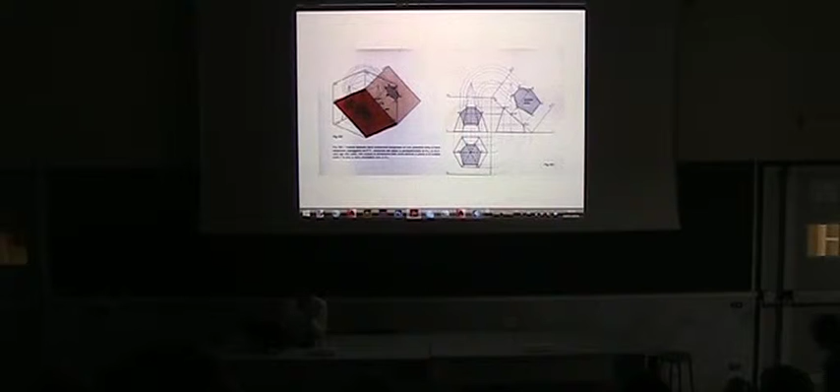Through these exercises, we start to be confident in knowing what's going on. So if we read an exercise text, we feel that we can do it ourselves, and that we can do it right. Then we start to imagine that this mental space has a light coming from somewhere, which gives the volumes a more concrete presence. And we get lost in these very complex drawings, which have very strict rules. They have their own law, and we understand that through these rules we can get to the end of an exercise.

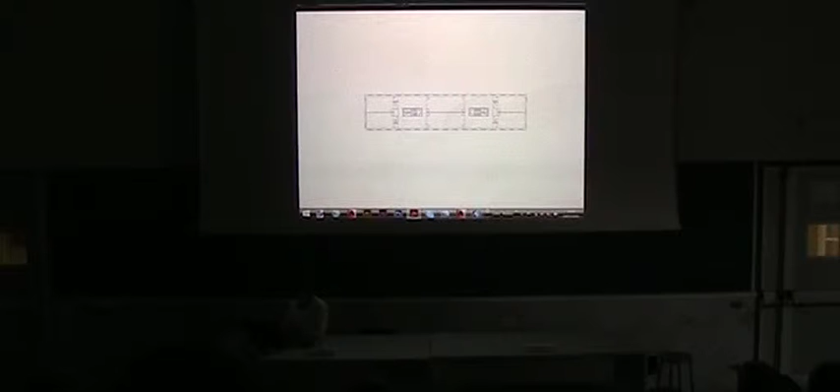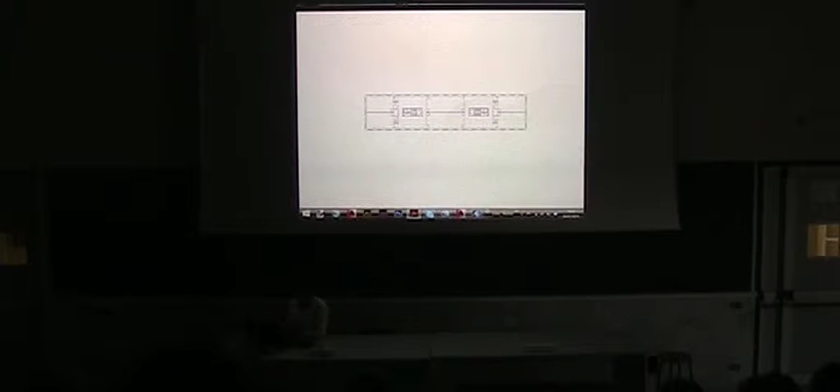This is a school made of glass and wood structure on the perimeter without any corridor. So classrooms are connected without corridors through 2 staircases. This is a house on 3 levels, in which each floor has a different relation to the exterior, to the landscape. This is another house I will show later, and this is a house with a 45 pitched roof.

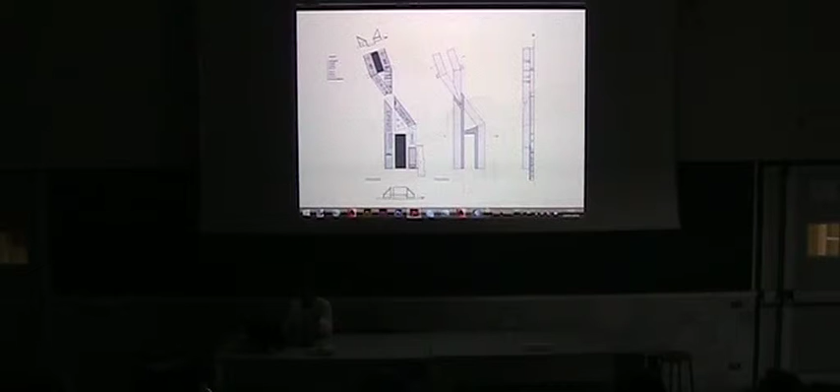This is a resort in Thailand, on Phuket Island. It's a project which is made in 2 parts. One is the apartments, and the other one is the restaurant and lounge bar. And it's made of 2 bodies, same shape but twisting each other. And so you have a space, a courtyard, which has high walls, and a courtyard which has low walls to define the space, the opposite of the space. Yes, you can see in the plan sections. This project was made all in metal construction.

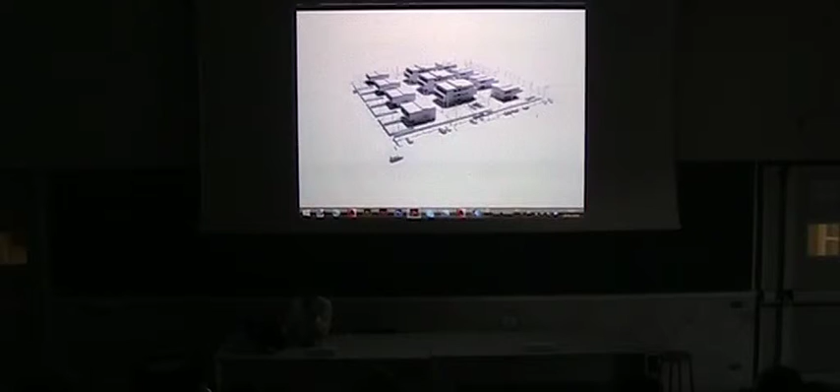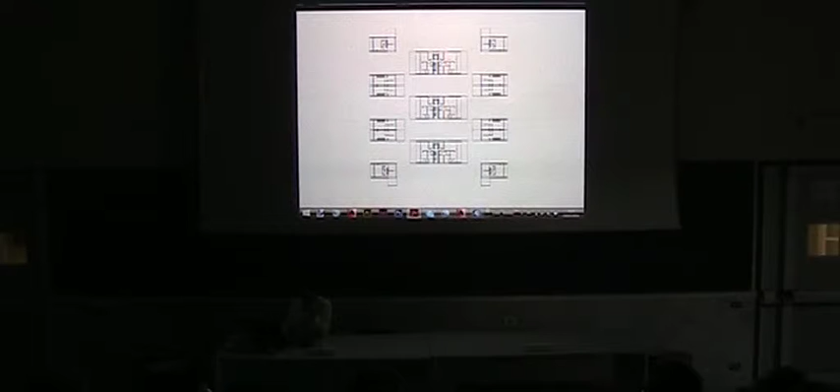One project of housing, which has interesting development because of the economical price. We started with a very simple principle to repeat the same buildings, and then because of a new price situation, they decided to change the typologies, but the scheme is still the same. And as you see here, it's mostly the same houses repeated. And the plan is not a plan of one single element, but it's a plan which is a whole, a unity again, made of 11 different volumes.

And again, one detail, because we believe that every project has one main detail. It's not about making a lot of details, it's about understanding which is the most important detail of each project. And this is the plan with a new definition of different typologies.

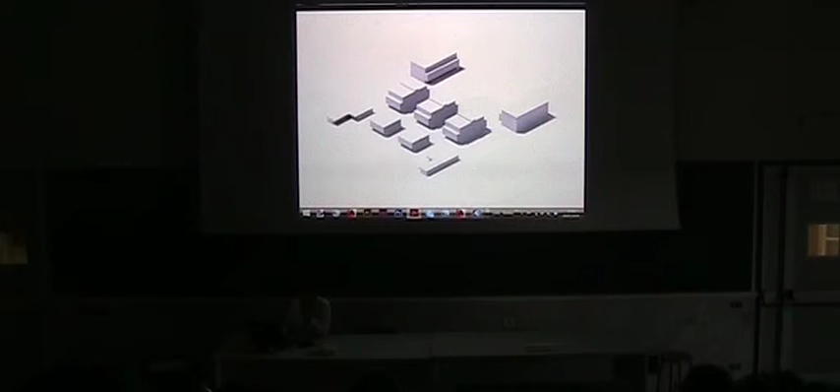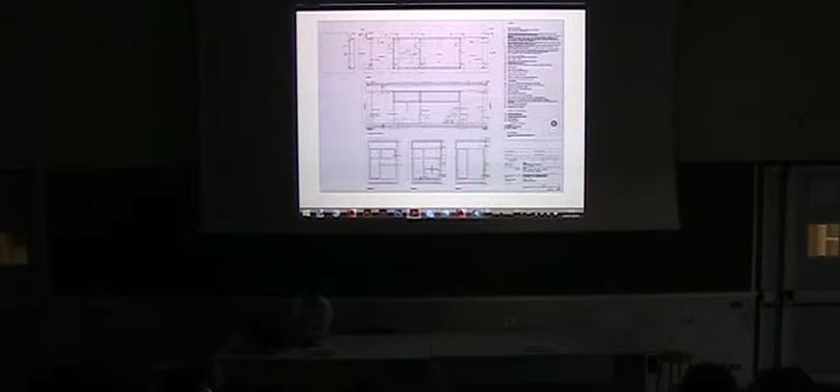This project is almost finished. It's dogs and cats housing. It's a place where abandoned animals are kept. And it started to be a modular project, a repetition of a single unity to make a variation. And this is the final unity, a very simple one. Of course, it has to be very simple, with a place where they stay, inside and outside.

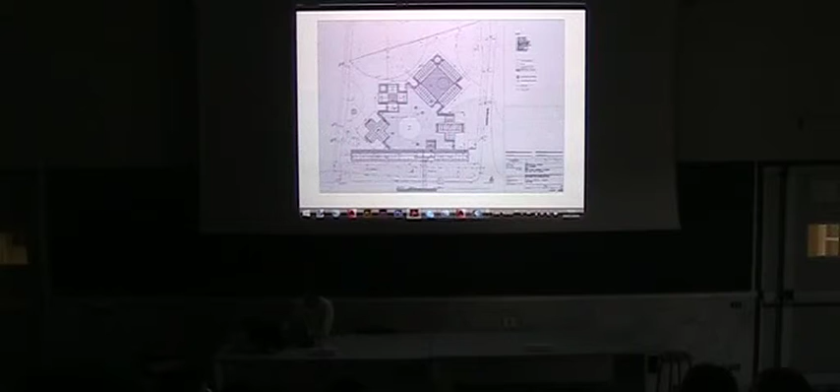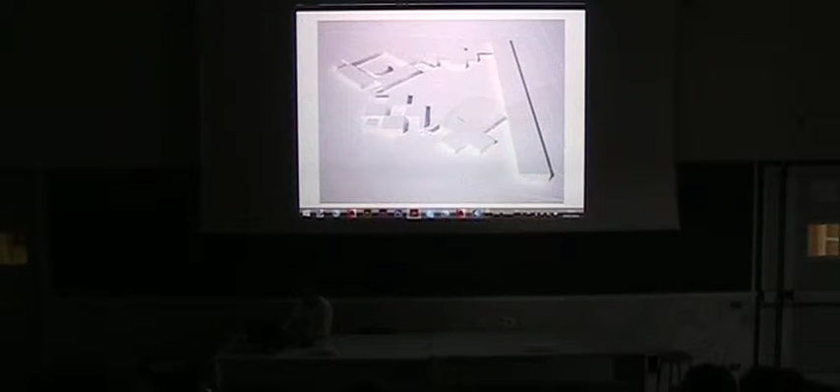And the repetition of this modular element in wood is making a complex of 4 pavilions and one main building, service building, and the 4 pavilions are twisted 45 degrees, one to each other, and create a central space. But also they have one central space each as a courtyard, that is the courtyard for the dogs or the courtyard for the cats. And this strong geometry you can see here in the foundations, or this strong 100 meters long wall of the service building.

Courtyard for the dogs, courtyard for the cats, and this recent image. And of course we exercise a lot of competitions, which is a way to produce architecture, to produce ideas, and to keep the brain on exercise.

And we won this competition, which is interesting because it's a house for builders, which is a place where builders learn how to build. So the project deals with materiality and process of construction, and we decided to use two very basic and very old materials, which are bricks, a small piece of bricks, and concrete. And the buildings are two buildings, but they make a unity. One building is a school, and one building is an atelier to learn how to build. But they are all made out of concrete.

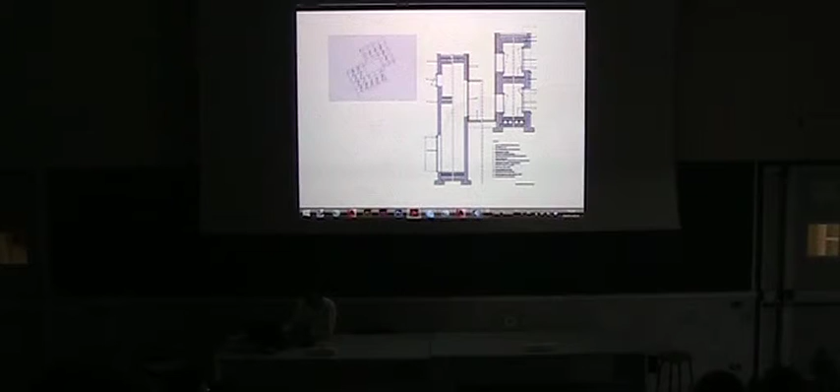One is one single wall with no insulation, and the other building is two walls with insulation. So the buildings outside and inside are both the same materials, and the courtyard is covered by bricks, as you can see on the plans. This is the atelier, and these are classrooms, all made out of concrete.

And these projects in Switzerland had a first prize and some other prizes. In Bern, it was a housing project along the railway line, and we could win the project because of the urbanistic idea, which deals with the linearity of the railway lines and the rhythm of the city, of a future city which would be built afterwards.

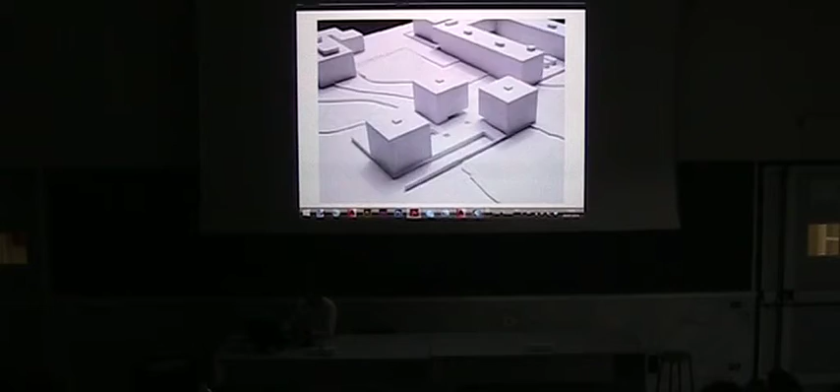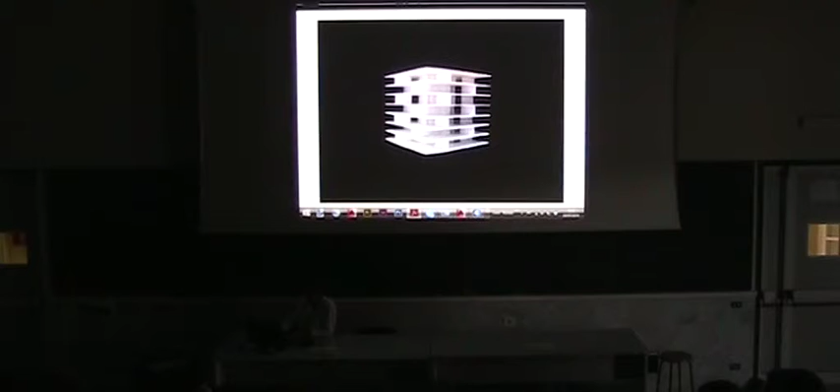For the students' housing in Zurich, the idea was how to make three buildings with one window. The buildings are cubic buildings, and the window goes around the four facades in a way that there is not a fundamental facade, but all four facades are equal. And this is the unit of the student room with a big window, and this window is prefab and it goes around the corner in this way, so that there is no principal facade, and also the structure is twisting all around.

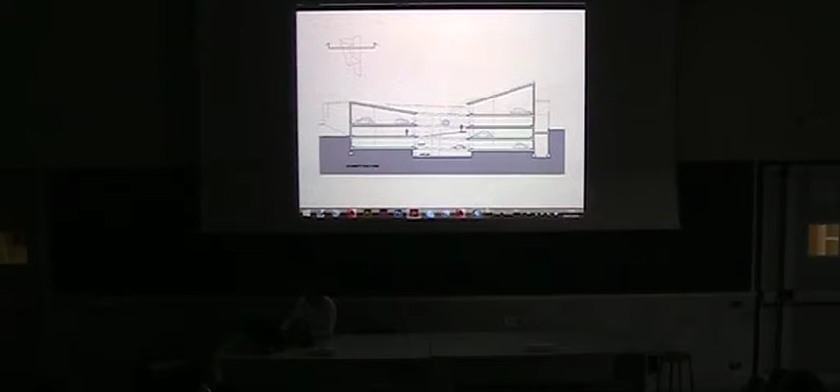And the parking building, which has been made with a courtyard, and the parking is all in ramps going up and down with 3%. Going up makes a spiral, and the courtyard is where people walk to go to the car, and the slabs and pillars are all inclined 3 degrees, and the roof also is not flat, so that the water will come down in the courtyard, and the light is also coming down as in a palazzo.

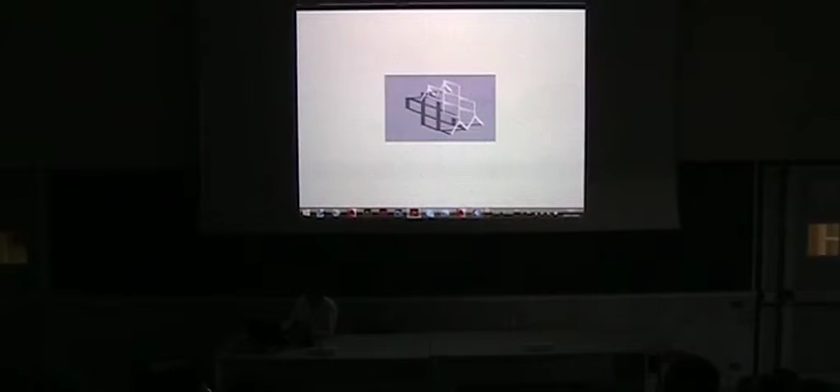Our school complex in Bern, where we established just one system of construction based on this element of wood. It's all in wood, and it's the superposition of the same structure which makes the buildings and the facade. And this is the modular element, structural element, plan, and the plan I showed before and repeat.

And this is also another competition won in Milan for the Expo 2015, and all these small slab buildings are meant to be made by one system of construction. We proposed to make this grid of 5 meters, but using not a square but these shapes. By twisting the pillars, we could make a structure made out of wood that doesn't need any supplementary element for horizontal forces, like walls or concrete walls, to make it work.

And then there was, for the Biennale in Venice two years ago, a call for papers, and 50 different architects had to collect about 40 photocopies of something, which was pyramids for me, and some others had hospitals or houses of bricks or whatever. And every architect had to make a research. So I started with the research of pyramids in history, but also, of course, you could start to see pyramids whenever and wherever, and you could start to see also a bridge.

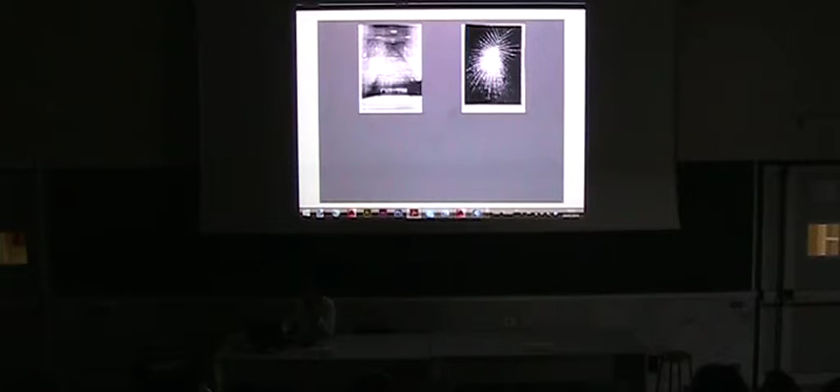And then after that we had a competition in Germany, and it was about making a museum, and we ended up making this proposal of a building which has not a pitched roof, but it's a kind of pyramid, because we started with this idea of a big roof, but then we could see that it was not working very efficiently. Instead, a kind of wedding cake, as this drawing can show, or candles, shows that spaces could be lit by the roof, and they could grow from the bottom to the top.

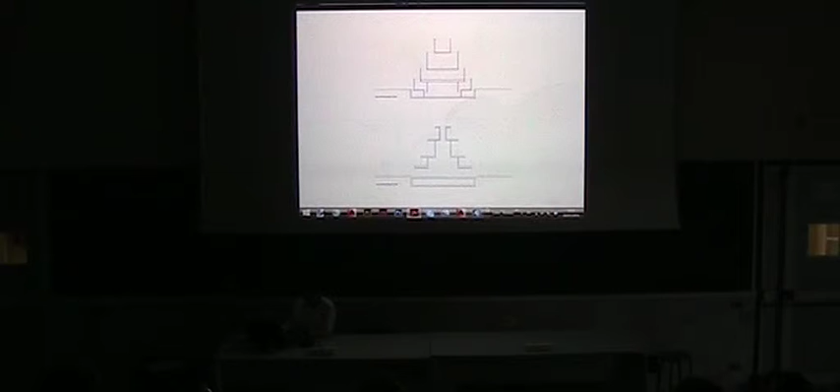So this is the building shape outside. This is the skylight, and the plans that are growing from top to bottom, and the eight rooms were asked to be different. So at the end we have an addition of spaces, one on top of each other, with different light conditions and different space dimensions, and that was the image of the interior spaces of the museum.

And then, as you could see from the beginning, a very important aspect in our work is houses, just because we had a chance to make projects, and we made about 10 different projects of houses. And here I show you some of these projects.

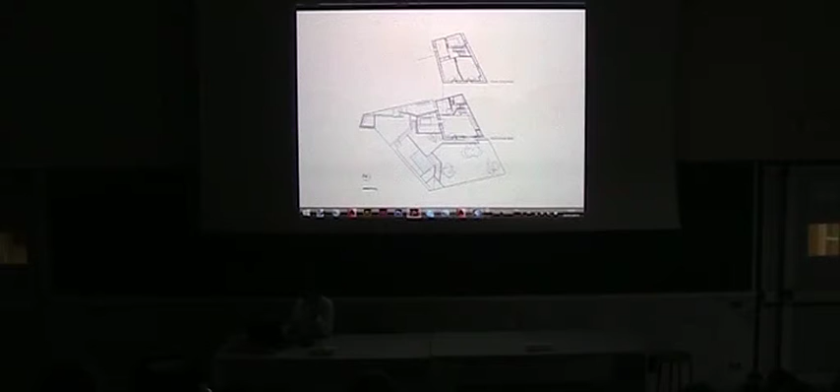It's my very first project close to Genova. It's a house which was reused, an old building with a funny, very strange geometry, and all the work was about making this staircase with a complex geometry, and the facade also with this stucco and white marble, which are quite common in this area, as you have seen. And it's a project of details, and this is the staircase from below and from the top.

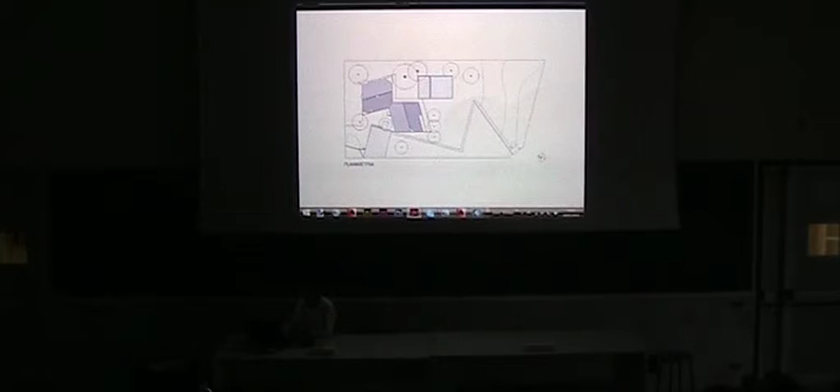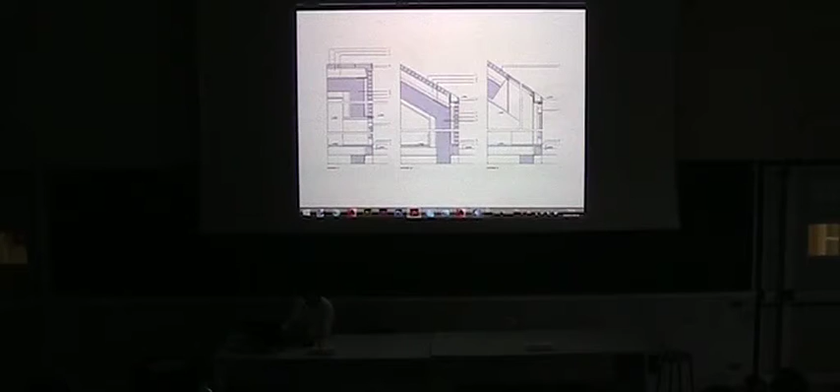And this is a plan, and these are the main details of the building, made out of bricks. And you see the image of the construction. We didn't put any cement between the bricks because these walls and the roof are just the finishing. They're not structural walls, so we didn't want to show this. We wanted to have only bricks, and we could use a kind of glue and have only one materiality on the facade, which together with glass makes the body of the building, as you can see in this image. Inside.

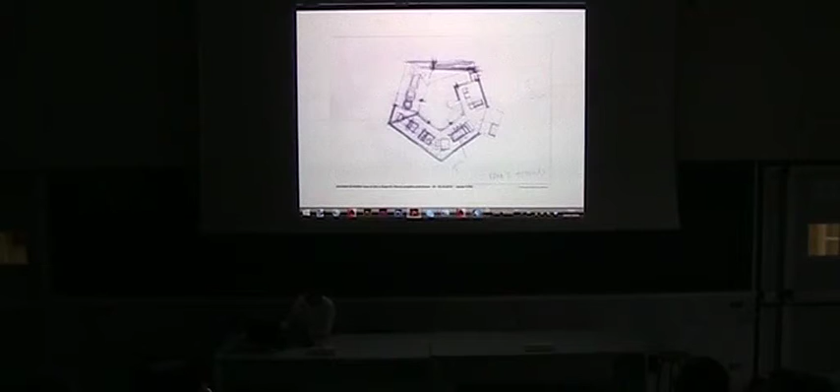This project is quite simple. It's a double L, one on top of the other, and this double L is based on a schematic plan, and it's an L-shaped space on the bottom, and the bedrooms on the top. And this is the common space on the bottom. The house in Korea with a pentagonal plan.

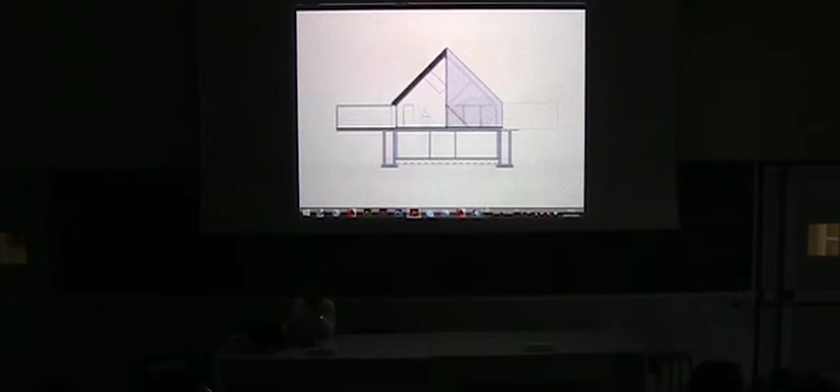And then this house is close to Roma. And it's made of tufo, which is a very nice stone that has been used a lot by the Romans, and it's a very cheap material. And the idea is to make a house all in tufo, with a pitched roof in a diagonal situation because of the slope of the site. And you can see the structure is in steel, and the stone, the tufo, is all in the walls and on the roof.

And the final project is a house again for a friend who is a director, who needs to have a second house for himself and for his sister, and this second house has to be very practical, not expensive, and could permit being used by him with his guests, and separately by his sister and family, but they need to have a common space. And the story started with a text that this guy wrote as a director to imagine what a house is for him, and he made a script.

And through this script we started the discussion, and for him it was a possibility to see how you make a project in architecture, and for us it was a good situation to discuss with someone else, an intellectual person making film, and try to see how the process works in both situations.

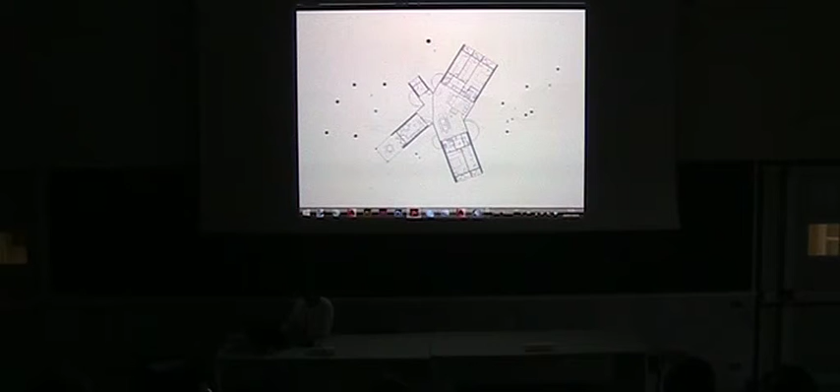You see the plan between the trees, and the geometry is arbitrary, but at the same time the places where they put furniture were very simple, because they had to put furniture from second houses or from IKEA or whatever, simple furniture not designed by architects, and so the rooms had to be very simple and quite generous.

But at the same time there was a rule, and the rule was the inclination of the roof. It was 7%, because the rainwater had to flow down from the roof to the ground directly, and the slope had to be not too much, not too little, to let the water go down. So you have walls that never have water coming down, and walls that have water coming down from the roof to the ground.

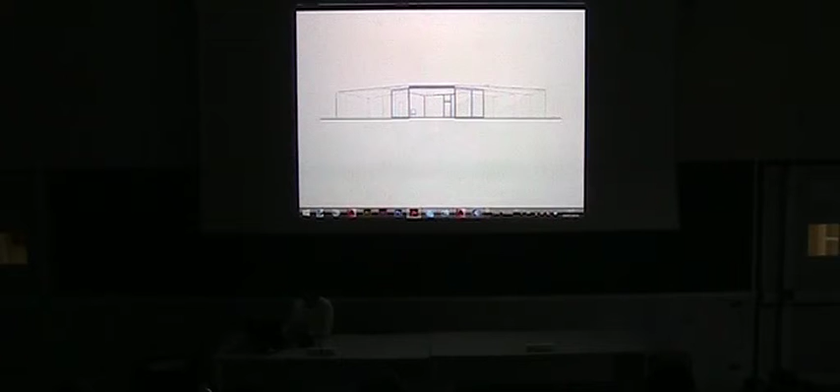And there was only one line which is horizontal, which is this line, and all the rest of the building, as you can see in this drawing, is not controlled. There is not a measure. It's not possible to make a measure of this facade.